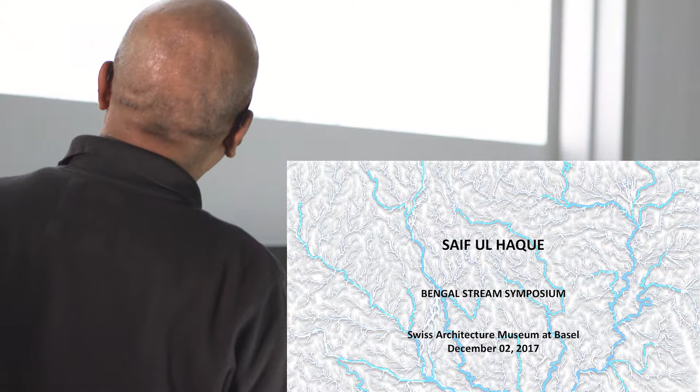Because it's all these streams that are there, this is a watershed diagram, part of the Dhaka region, and how they sort of flow into a larger stream, and then into the river, and then this whole system of water and land. So I use this in my title. It also has another sort of meaning or message. Because in the title I use my name, Saif Ul Haque, and then there's the Bengal stream, and then the Swiss architecture. So what I'm trying to express in this slide is that you have the individual, you have the small stream, and then they forge into a larger stream, a larger network. We are all connected.

When this morning Kazi showed this slide of Basel and Dhaka, I couldn't tell that he was having two images over there. One was this alpine landscape, and the other was the deltaic landscape. But they look so connected. So I'm very happy that we are getting this scope of getting connected. Thanks to Nicholas, thanks to Vivian, thanks to Andres, thanks to all of you. This is an amazing thing happening.

So this one is the individual and the collective, and all the wonderful work that we architects are doing all over the world. Many we do not know, many we know of. And this exhibition, this publication, is one of those things that lets all of us know about what each of us are doing. Even in the days of internet, these exhibitions, these publications, have not lost their appeal, they have not lost their meaning.

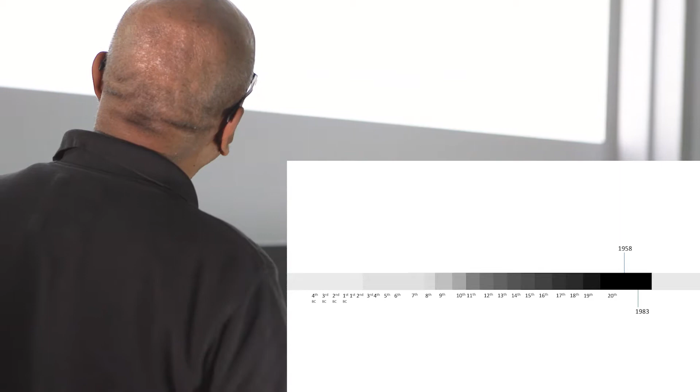I prepared this slide for this presentation, that when one is born at a particular time, I was born in 1958, you inherit things. It's because things have been done prior to your birth. And then in 1983, I completed my studies of architecture. So in 25 years, further accumulation was done to that inheritance.

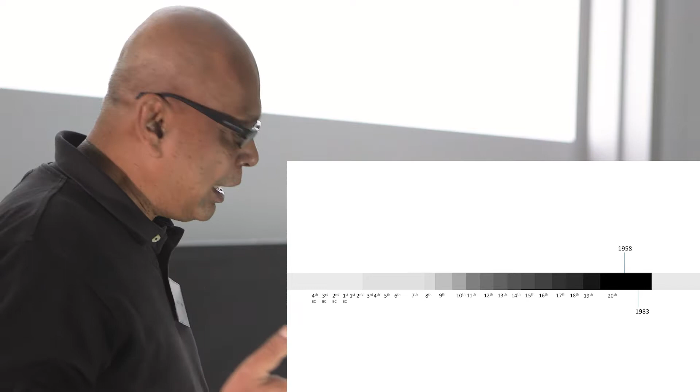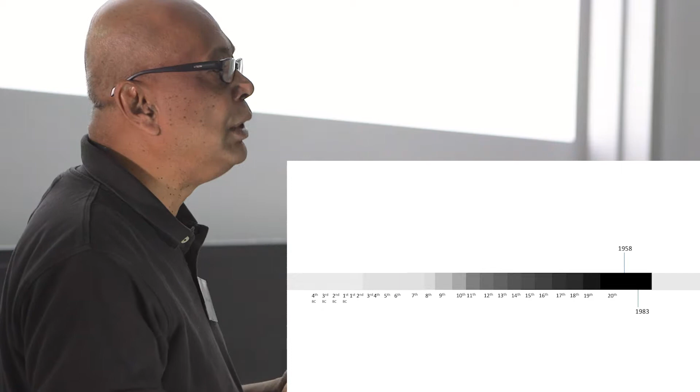And when one works, I continued to work in Bangladesh, and I felt, especially this morning we're talking about Chetana, how we had questioned things at that time in the early 80s. And there was this feel, the urgency that we need to establish connection to history, to the land where we're going to work. And at that time, we thought that it was not actually happening in that way. So this slide, in the exhibition you will be seeing a lot of drawings and slides like that.

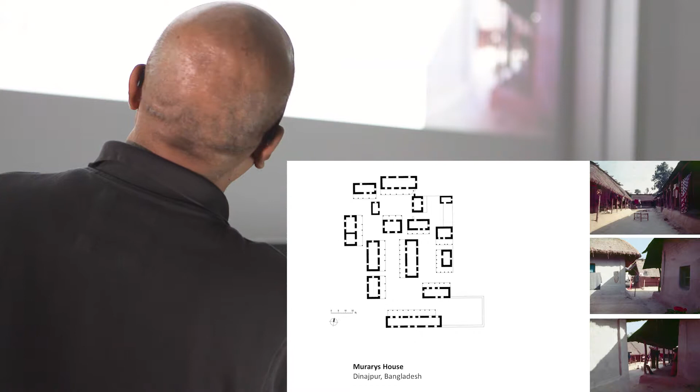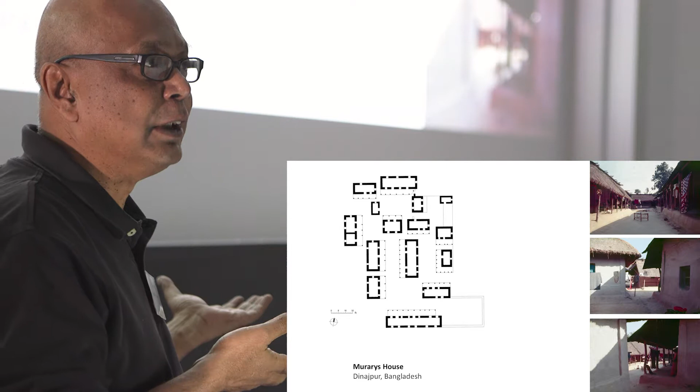And then the vernacular architecture, the arrangement of the village houses, the courtyards, the pavilions, the veranda, the thick walls, the leaking of one space into another. To me, that was my teacher, that I could learn from this and I could do an architecture that could be inspired by this.

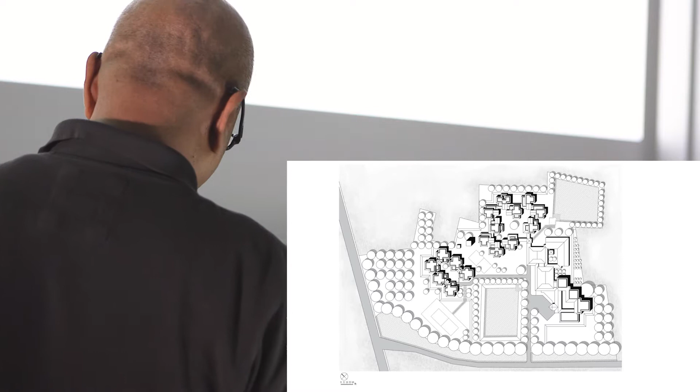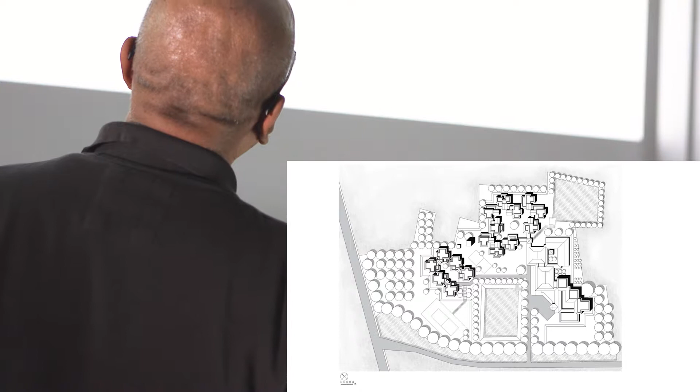Three groupings with a big pond to get the land raised, a floodplain. So this was the academic and the common facilities, the dormitories for the trainees. This was a training center for people from the villages coming to get training, to get organized to fight poverty, to work for development. You know that in Bangladesh, the NGO movement has covered a lot of ground, and BRAC is the world's largest NGO.

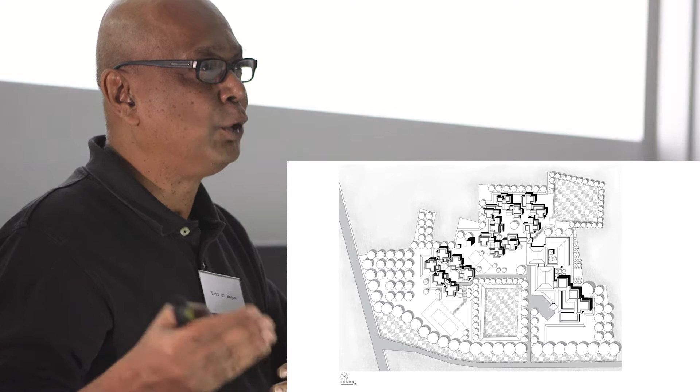And also there was another thing which Kazi referred to, our connection with socialism. So this NGO movement was also patronized mostly by Americans who wanted these marginal poor people not to go on a radical path of socialism. So microcredit and other things were introduced. Anyway, this was a training center that we designed in 91.

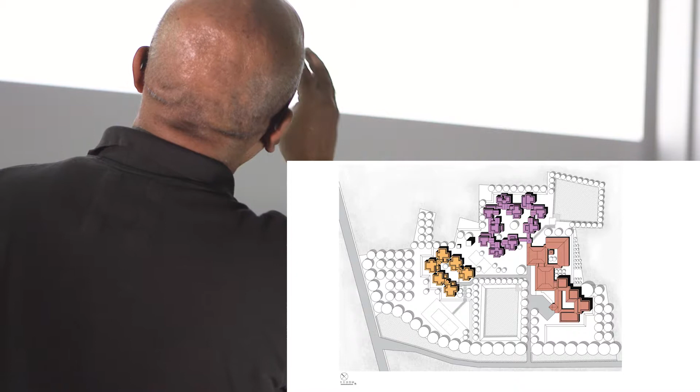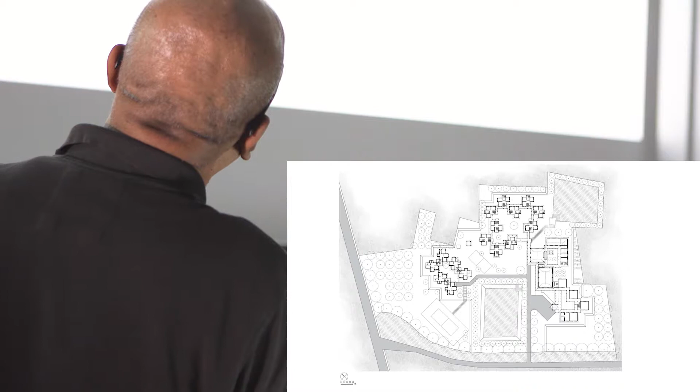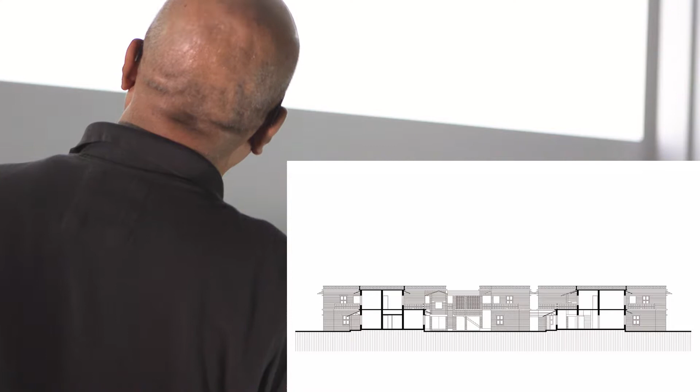As I mentioned, three groups of functions organized around courtyards, and the ground level. So there is this connectivity. During monsoon, one could walk through the covered path, and in the other seasons, you had the option of being in the open. The circulation and the section. So, open to sky spaces, shaded spaces, and covered spaces. All in the modest scale of two stories.

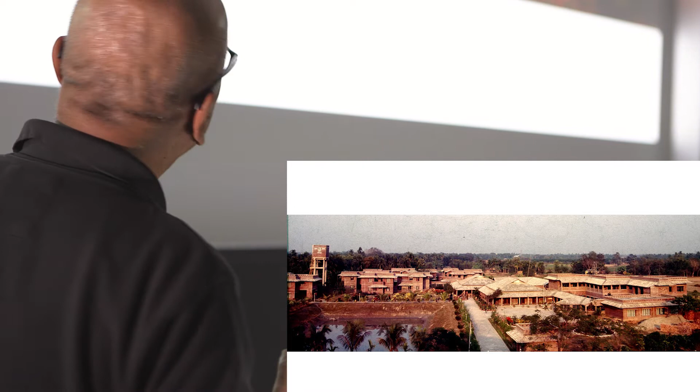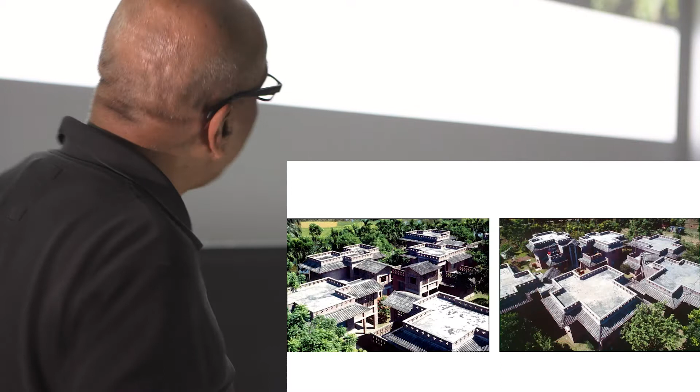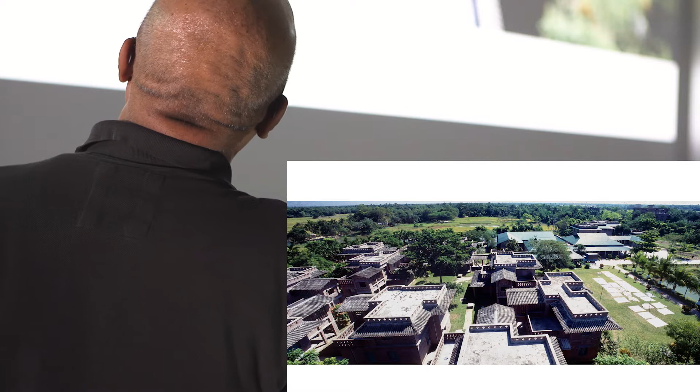And then going up in the water tank, looking from above at the clusters, the houses. And more, again, how it is connecting to the landscape beyond the site.

With very close spacing, we got another opportunity of designing a similar training center, but this was on the edge of one of the cities, the 10th largest city, larger than Basel or Zurich.

That's what you said? Zurich, yes. Zurich would be the 11th.

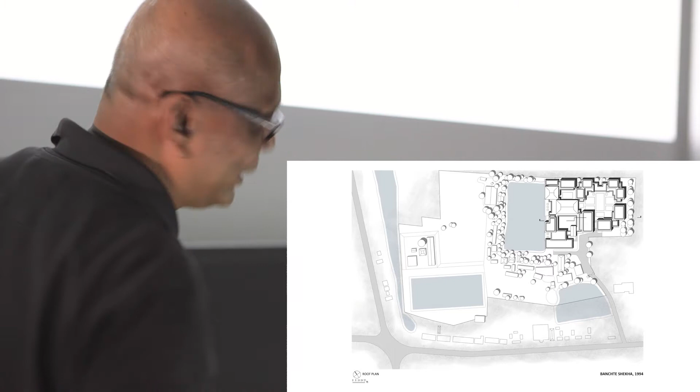So this was in Jessore, at the edge of the city. This is how we got the site, the path leading into the site. And this is the master plan we worked out. So this is the photograph which I had shown, the path leading into this site. It was more compact than the other training center, and we went for a compact organization, but still with courtyards and pavilions.

Okay, I see Vivian. So let's just see the images. I'm not going to, yeah, because we had.

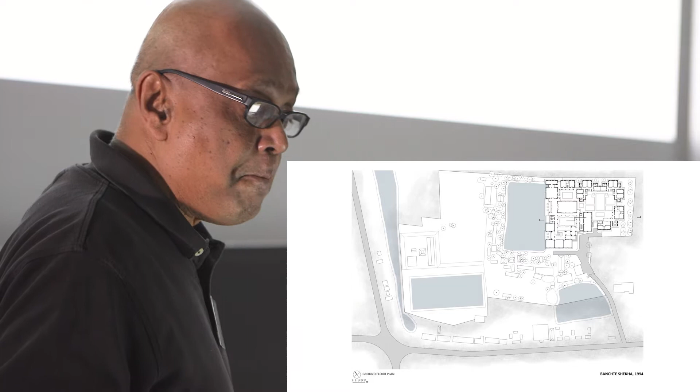So this is how the functions are grouped. The water body is existing. The circulation, the first floor, circulation, and the section. The water, the courtyard, the houses. And again, images right after construction and after it's getting used.

The first courtyard, the academic courtyard, the entry, using local handmade bricks, and the fenestration for the tropical climate, and the residential units, and of course, the monsoon drama. So I'm showing clouds instead of rain. I thought that this would be a very dramatic moment to photograph the project.

Interestingly, the client for that project was a Bangladeshi NGO that was funded by a Norwegian group. And then I had a French archaeological team who had seen that earlier project and wanted me to design this camp house. They were there for 3 months in a year, excavating archaeological relics. And this is the site we got, and this is what we had proposed.

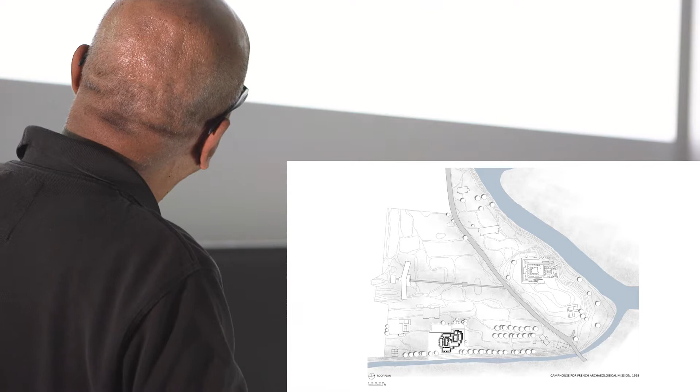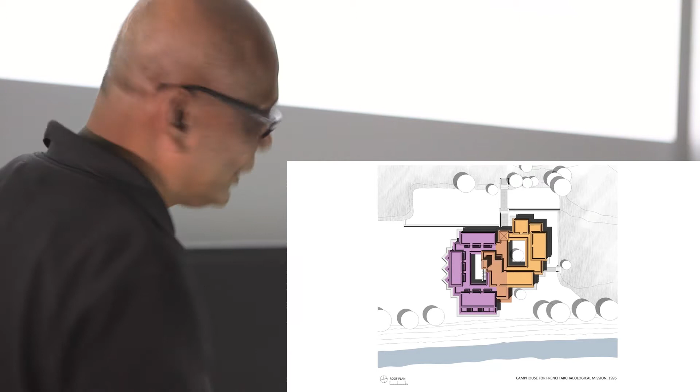So there was this river, Karatoya, a ruin of a temple, the museum, the guest house, the office. So this was the site given to us, and we proposed this house and a workplace for the archaeologists, 2 courtyards, one for work and the other for living. So this was the area where the archaeologists would work, and this is where they would retire, rest. All single story, because we're close to the rampart and we wanted to keep it modest.

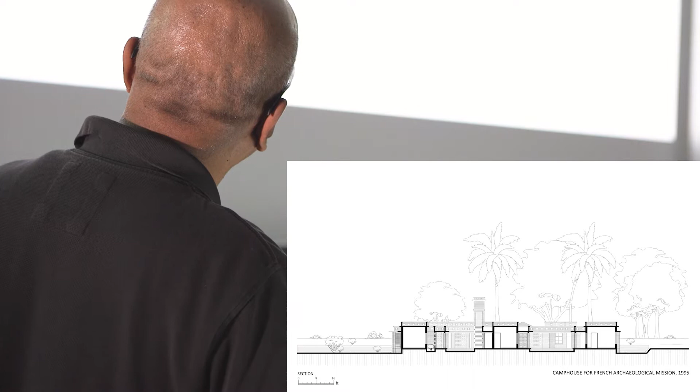The plan, again the section: building, courtyard, building, courtyard. So open, void, and closed. And for the bedrooms, we created a buffer of brick screen, a void, to allow privacy, and you can keep the windows open. So the entry from the west: we wanted to catch the southern breeze, but protect from the western sun. This is the east, with some palm trees. We kept the palm trees.

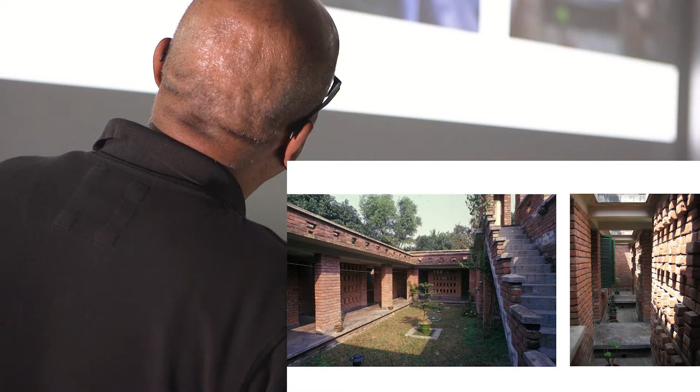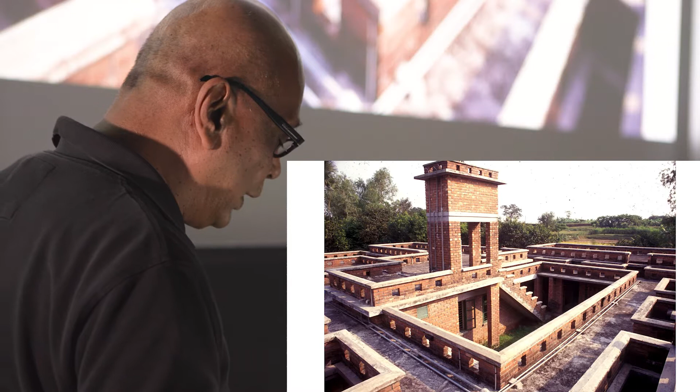And the courtyard of the workplace from the roof and from the ground. The courtyard of the residential part, and the screen I was talking about, the buffer, and the details with handmade brick, cement, and the panorama, and the roofscape. Again, we wanted to establish connection. That's the rampart of the ancient city of Pundranagar. That's where the book's name comes from. And this was our roof terrace. So voids and solids and the connection.

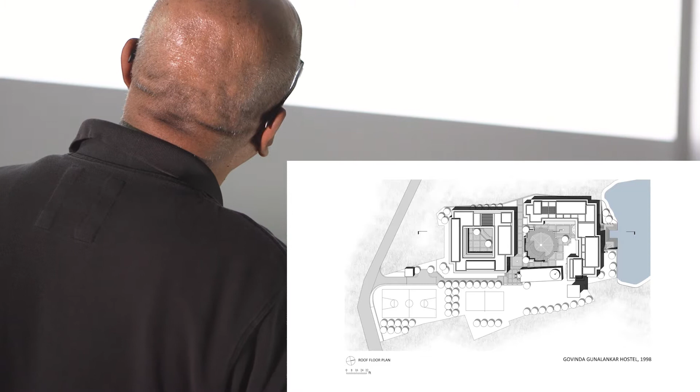A hostel in Chittagong, the site, the plan. It was done in 2 phases. We built this first hostel, the second hostel. There was the existing temple, there was water, the grouping, the circulation, first floor, circulation, section, the first building, the courtyard of the first building,

and then the second building, the connections between the first and the second, and getting to the edge of the water, and we had this water tower. We could look at the plaza that was being built at the time.

And finally, this project. So all the other 4 projects were built in the 90s. And there's been a bit of a gap till my next project, and this was in the early 2010, 11. I got to see a site that my aunt had purchased. She wanted me to have a look at this place. She wanted to build a school.

And when I visited the site, this was somewhere like, I think it's October, right? And I said, where is the land? It's only water I see. And she said, no, no, land will emerge. It's like the land is not there. So I visited a month later, and I really saw the land emerging.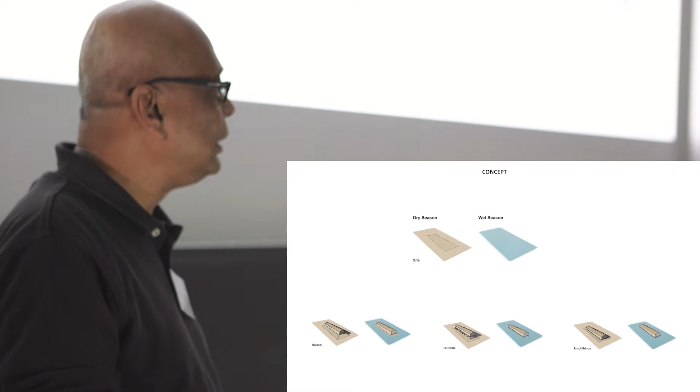But what to do? A place which remains submerged in water for 4 months, and 8 months is land. So what is the strategy we could take? We could raise, and when the water comes, if we are above the flood level, we are safe. But the narrow strip of land that I had, if I was giving the proper slope, I would lose the land. I just could probably place the school.

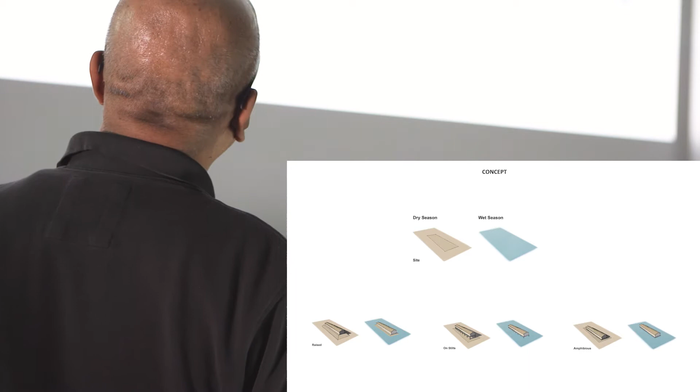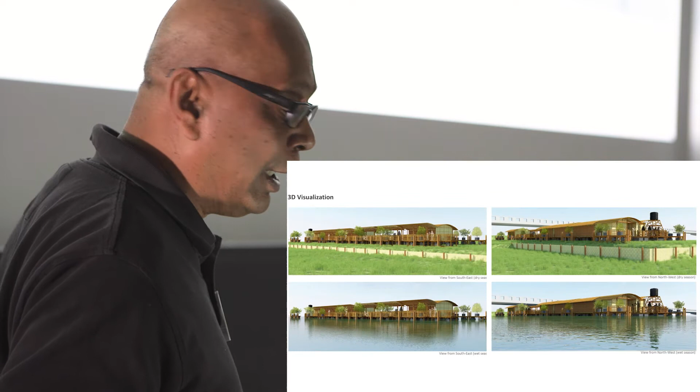I could do it on stilts. So when the water comes, we are again free. But during the dry season, I think that going up to the school over there probably was not a good idea for the children. And also it was going to be quite expensive. So we thought, why not do something which could be amphibious, but with very limited resources, with low tech, not very high tech.

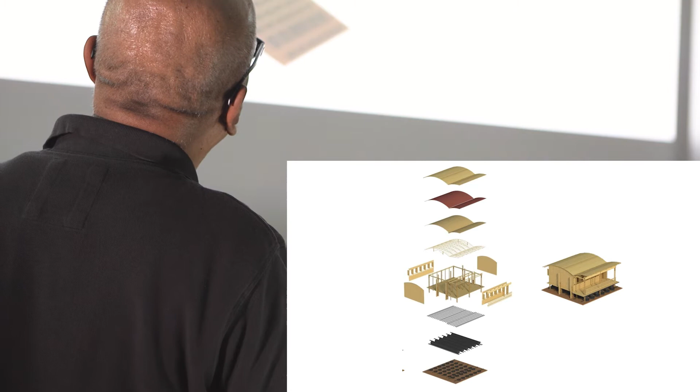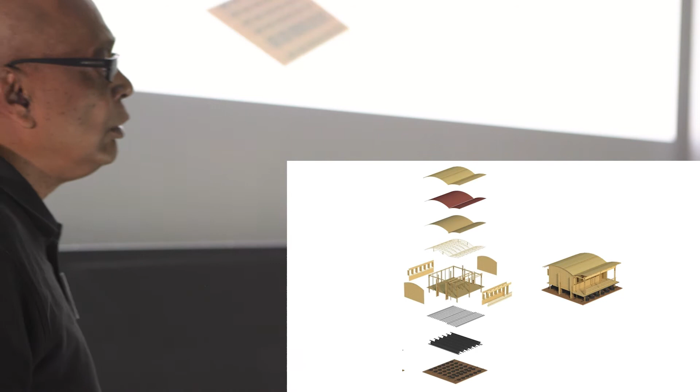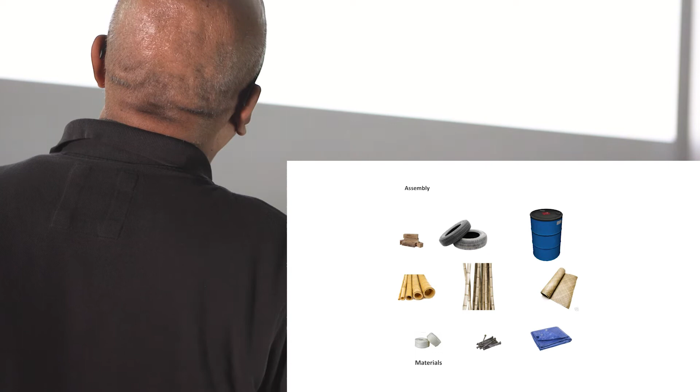So these are the images that we created. And this is the kind of assembly that we thought of using: old car tires, old steel drums, bamboo all along, tarpaulin. And we devised a module which could go up and down. During water it floats, and during the dry season it could rest on ground. So most of the materials were recycled stuff, and some were new things.

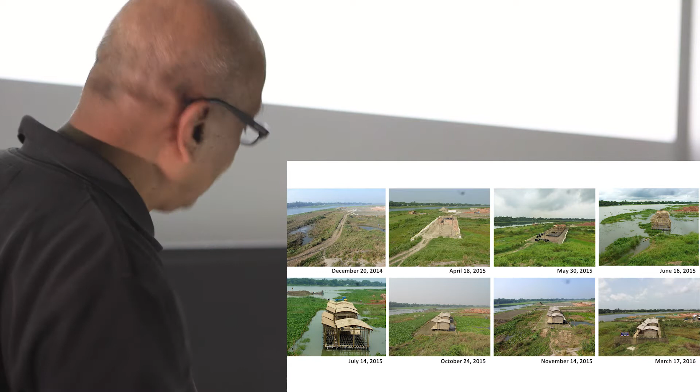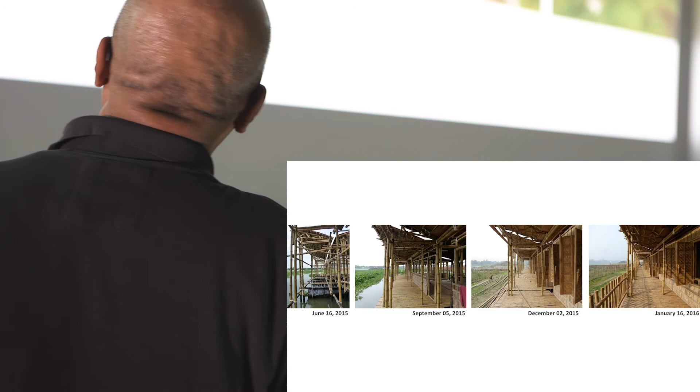So this is how we assembled the whole thing, and this is how it was devised to sit in the landscape. The plan. We needed to create a level ground, because the structure needed to rest not on an undulating surface, so we shaved off the top. We collected the soil, we put it in cement bags, and we created this protection. You can see in this image how it was put together. So this was the earth that was collected from here and put here to protect the site.

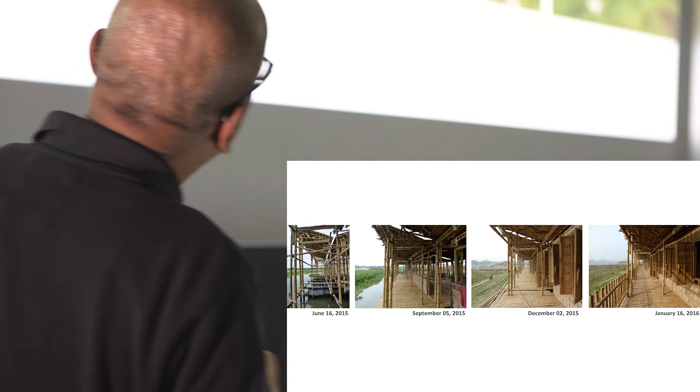And this is how it proceeded. We started in December 2014, and by June 2015, we already had water. But we were lucky that we had put the substructure, so it could float, and we could continue constructing it on water. And this is the photograph of how it was put together at various times. This is in the exhibition, so I'm not going to explain much.

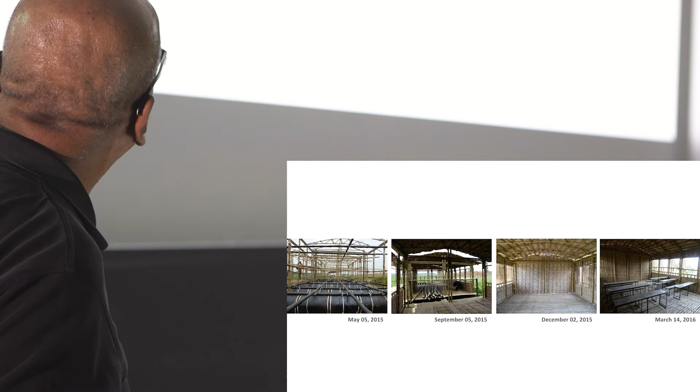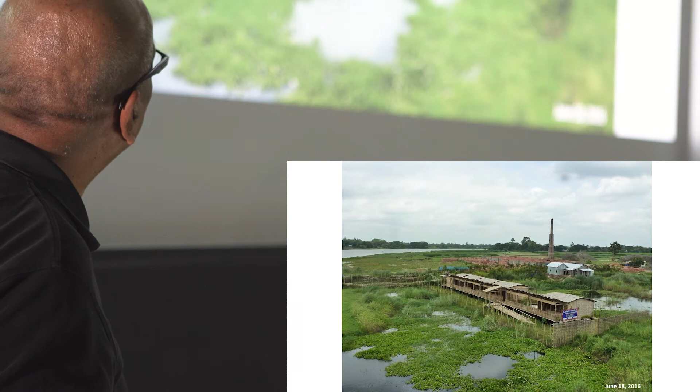Some of the images are already there, the way we put it together, and when the water came, how it was like. And when the water was not there, we had this beautiful mustard field, and then again, water came. We put up signboards, fencing, and then we mapped the coming of water and receding of water.

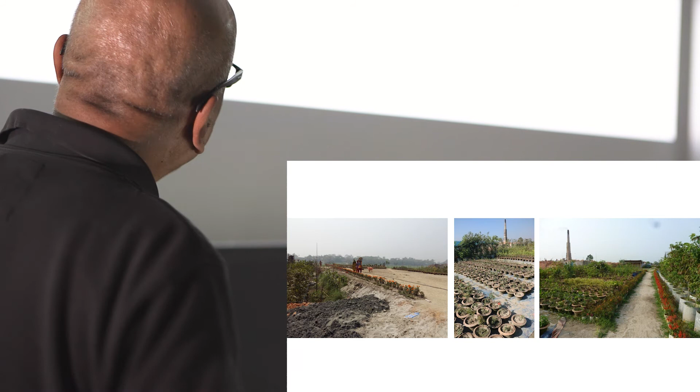And then my aunt also has a nursery. She was running the school earlier in a rented premise, and she had this plant nursery to support the school. When she bought this land, she raised the ground. But in one monsoon, that was not enough. So it got flooded. She lost a lot of plants. And the school was used as a rescue place for the plants. Some of the plants were moved to the corridors of the school.

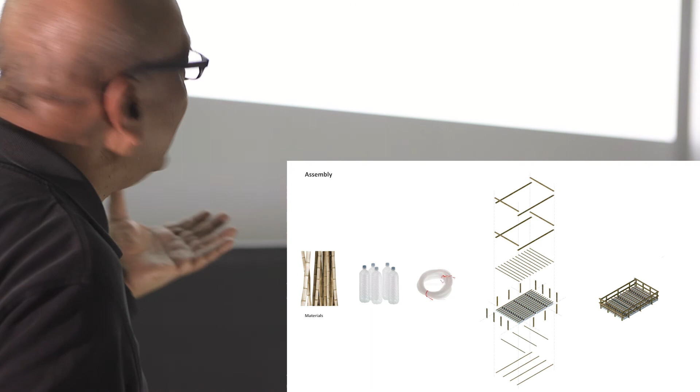So then again, we devised, using used plastic bottles, nylon ropes, bamboo, a floating platform, and with the skills of the people who build, put up a floating pavilion. So we would like to implement this like a terraced nursery, so the lower level can get flooded and she can still have the plants.